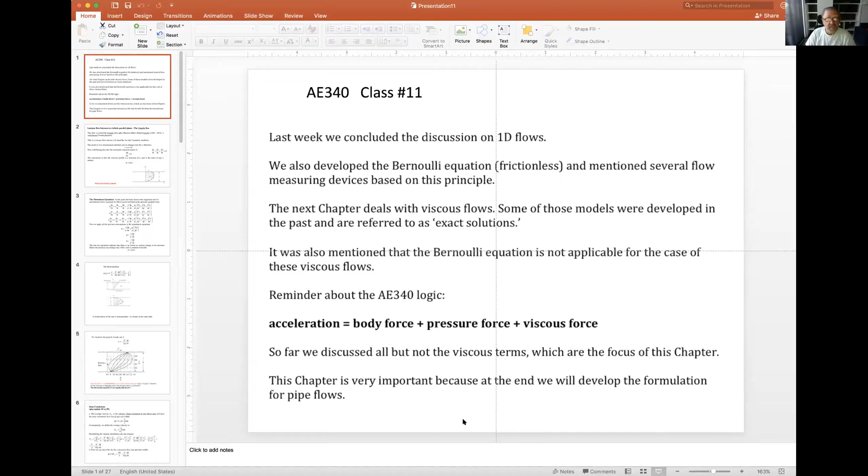We developed the equations, then moved to hydrostatics for the pressure, and then got back to the integral formulation for the one-dimensional flow. We added the Bernoulli equation, which is good for frictionless flow. We've seen that people like that kind of model, and many instruments, even if there's slight friction, are based on that principle: Pitot tube, Venturi tube, orifice, even injectors could be modeled with this type of approach.

Then we started actually looking at viscous flows. I'll repeat a little bit what we've done very quickly. In the past, those models were developed sometimes before even the full equations were completely clarified. They were referred to as exact solutions because they thought that the formulation of the problem is exact, therefore the solution is exact, and now they refer to that as exact solutions for Navier-Stokes equations.

Then just to confuse you a little bit, I told you that the Bernoulli equation is not going to work in this case, although there is a velocity distribution between the two parallel plates which are moving. The velocity is changing since one of them is moving the fluid, but the pressure is the same vertically, so you cannot use Bernoulli. This is an example where it's not working because friction is responsible for the whole flow.

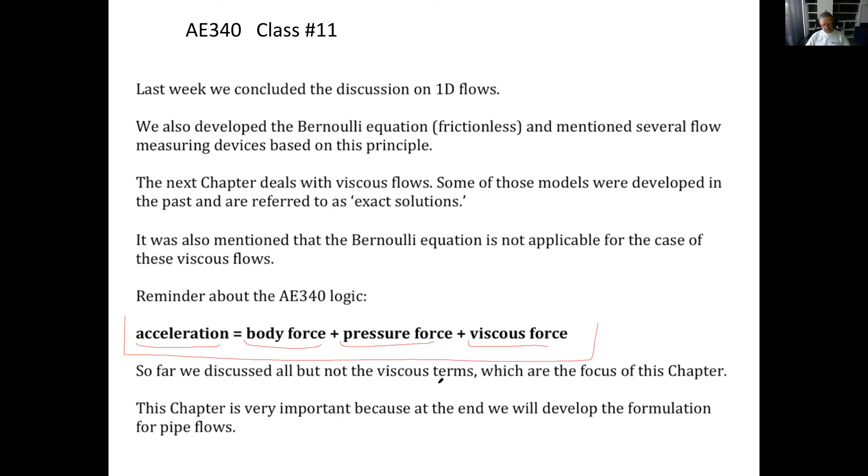So that's the whole chapter. But then the important part is actually the pipe flow. Later on, we're going to see that the pipe flow was developed experimentally, and amazingly, it is exactly the same as what we're going to arrive at using our formulations. Okay, so that's just the beginning.

So now what I'm going to do is just very quickly go over what we did so far. We tried to do the laminar flow between two plates. Let me get the pen. So this is the picture.

When we started the semester, I had this case where the upper plate moves and the lower plate is stationary, and we developed a linear velocity distribution. I call that a shear flow. The one we're doing now is a bit more generic because it also has a pressure distribution or gradient.

So why would the flow move between those two plates? Option one is that the upper plate moves and the lower one is stationary, and therefore the upper plate, because of the no slip boundary condition, kind of pulls the particles in the fluid with the surface. That's the linear case, this one.

The other reason is that, say, none of the plates are moving, but there is a high pressure on the left-hand side and low pressure on the right-hand side. So the fluid is being moved. Your toothpaste, that's how it works - you push high pressure on one side, the toothpaste comes out the other side. Same way. So that's the same model.

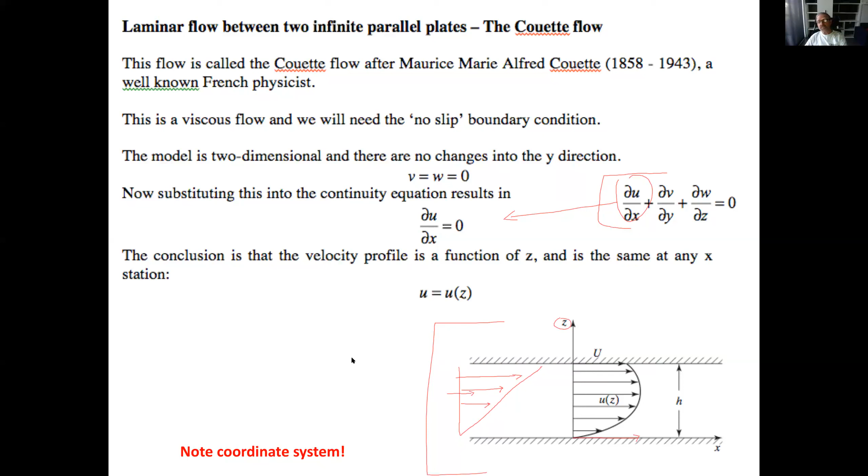So I'm still repeating what we have done last time. That was the continuity equation. Then we move to the momentum. So here is the...

Incompressible, steady state - I know you love that - with the assumption that there is no velocity in this direction, no velocity in this direction. So we ended up only with the pressure equals zero, or the pressure gradient. So the pressure must be constant in the y and z directions. And only some terms from that equation remain.

And then the right-hand side term is related to z, and this one's related to x. So we conclude that because the flow is continuous and it's happening everywhere, this must be a constant, this must be a constant. So the pressure gradient along the direction is kind of a straight line. So this is dp/dx.

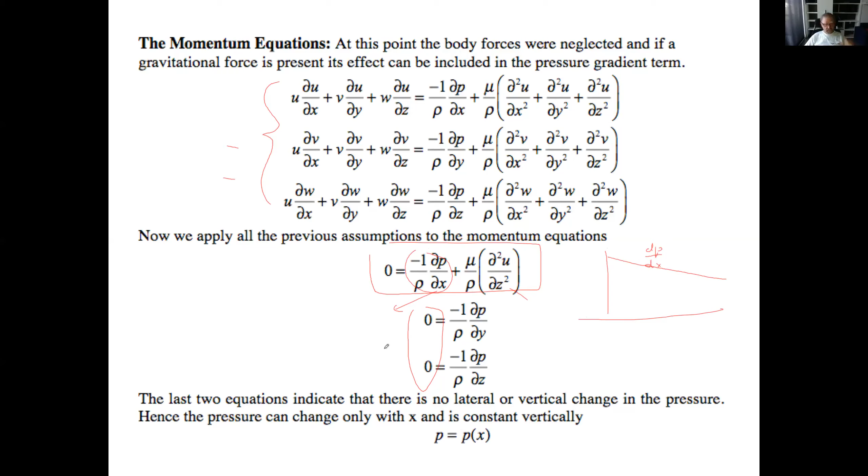dp/dx, and actually we can use ordinary differentials. So the pressure varies only with x, and that's it. So we concluded, which is very logical, a mathematical thing - we're not wasting too much time.

Then we integrated that expression twice, and we ended up with a velocity distribution. Not very difficult, straightforward, high school stuff. We ended up with this. If you put z over h here and make this term z squared over h squared, it's very clear that term is a parabola.

And this term is the shear flow that we studied at the beginning of the semester. So in this case, the flow moves because of the upper surface motion. In this case, the flow moves because of the pressure. Of course, there could be a combination of both, and that's why we have this here.

The minus sign is a result of dp/dx. If you remember, if you want the flow to move in this direction, the x direction, then the pressure has to go down - high pressure on the left, low on the right, so dp/dx is negative. This term is negative, therefore we need the minus sign here. And then I showed the combination of the two flows. This is a combination of the two flows.

Schematically, this would be the clear shear flow. This is when pressure is zero. Pressure is negative, pushing to the right, so it's a combination of the two. If the pressure is pushing to the left, there could be a reverse flow.

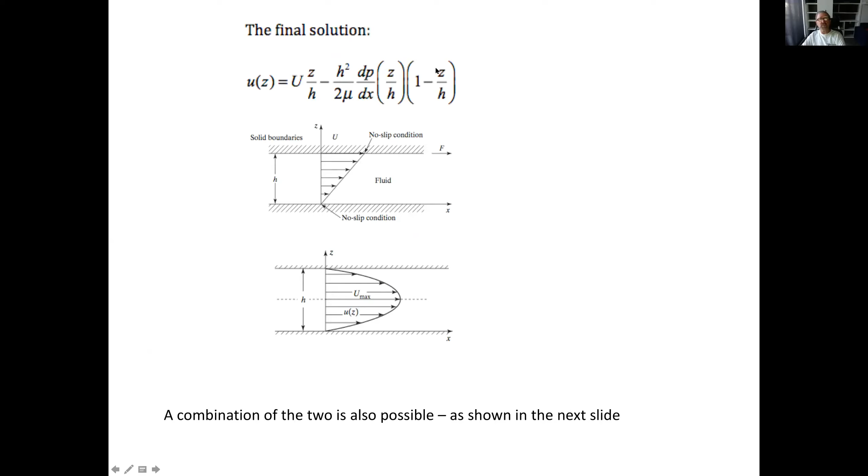I would like to also find out what is the maximum velocity. So what we do is we take the derivative of that velocity distribution. Let me go back here, remember that's the velocity distribution. I take du/dz, so it's going to be 1 over h, and 2z over h.

Okay, so that's what I did exactly, here it is right here. Now we want to find some sort of maximum, so we equate that to 0, and then we try to solve for the position. Let's solve for z over h, and we got this expression.

It's a bit tricky, I'm not sure if it's very elegant, but that's what we achieved. So now if we have this case, then what would be z? Remember, z goes from 0 here, to z, and to h.

If I have a pure pressure-driven flow, then u is 0... sorry, let me correct myself. In this case, the maximum velocity here -- because if you put dp/dx equals 0, that thing blows up, so it's not working. But in the case when u is equal 0, then we got half, which is this case. So this case is good.

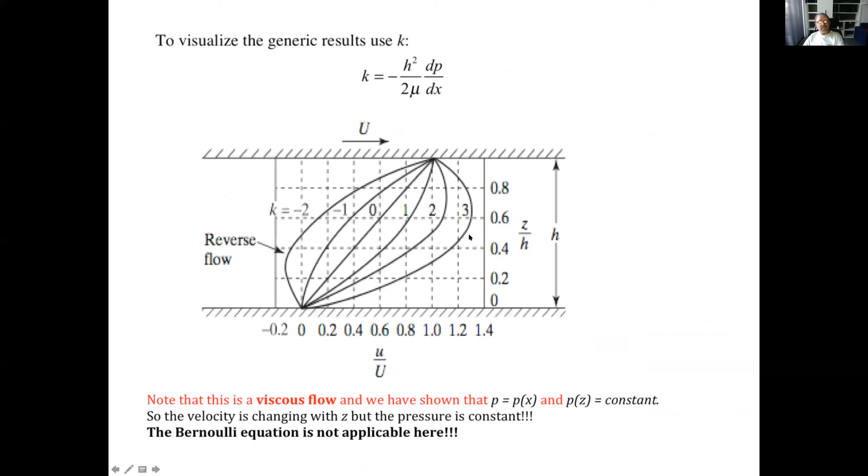Now, this is the first time that the Reynolds number pops up because of the algebra that we're doing with the fluid flow. Okay, so this is a very important moment. You guys should be really excited. I don't hear excitement now, but that's good, good. Thank you very much. Thank you. I have to cheer.

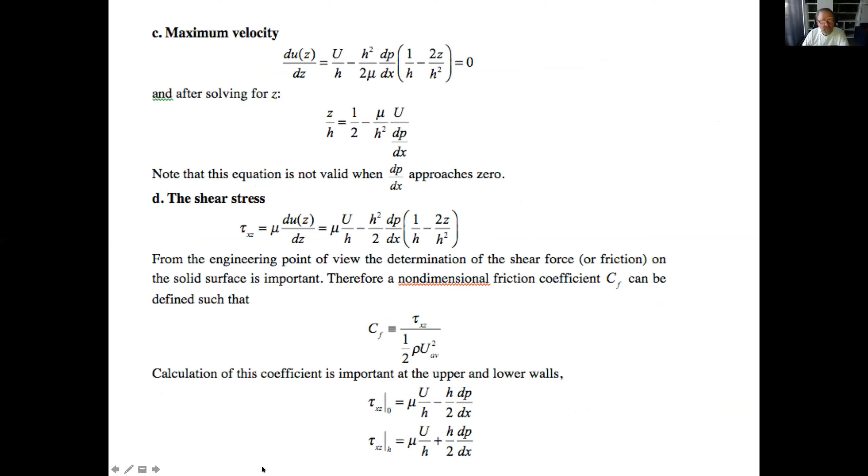It's not working well for me. Okay, I'm back here. Oh, I didn't select the pen. That's why I didn't like it. So here it is. We're going to see this trend.

So if I plot here Reynolds, which is basically velocity, then the trend is negative. So typically the friction, the relative friction, not the absolute friction, will go down with velocity. That's very interesting. We'll see that later on when we start talking about experiments with pipe flow. Okay, so we did that one.

That's the first time. Let's repeat the same thing. I think we're gonna have a numerical example. Let's have a numerical example, and then we repeat the same thing for the flow with pressure.

All right, let's see the numbers, how this thing looks. So we have two plates, the upper one moving at 5 meters per second to the right. The lower plate is stationary. Clearance between them is 1 centimeter.

We want to find out how much force is needed to move the plate. Let's see what we've done so far. The average velocity is at the center, which is half of 5, so 2.5. How much fluid goes through a section per unit width, per 1 meter? It's 0.01, which is the height h, times 2.5, the average velocity, multiplied together giving cubic meters per second, a very small number.

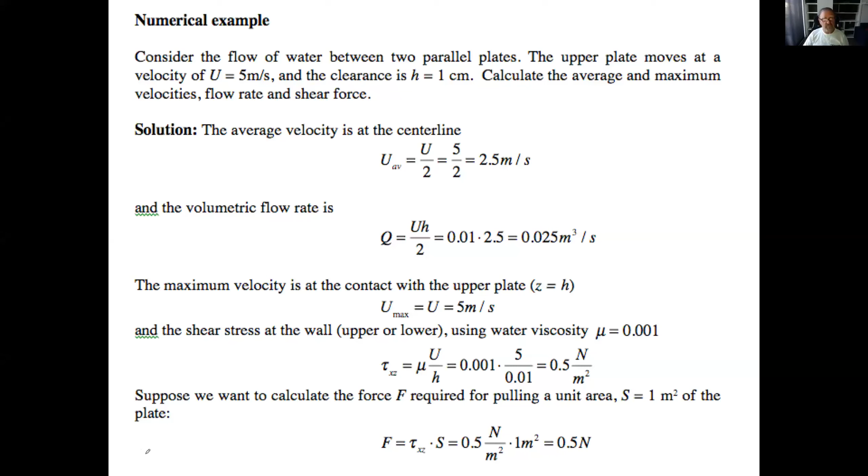Okay. All right, thank you, moving on. Same exercise. Okay, let me grab the pen.

So it's the same formula for the velocity distribution, but I dropped the first term, which is the u half, z over h. So I dropped that one, and this is due to the pressure. Going back, if you look at the formula for the average velocity, we lost u half here, so that's the term that remains.

One more time, average velocity versus pressure gradient. I was all excited about that, if you recall. Pressure and flow rate are related directly. The volumetric flow rate is the same per unit width, we just multiply by one more h, okay? And then there was the formula we didn't like very much, with z over h. But remember, it turned out that if u is equal to 0, the second term vanishes, so we ended up with z over h. So the maximum velocity is at the center.

At the center, we go back to this formula and plug in z over h equal to h half. So it's going to be 1 minus 1, 1/2. So this is going to be... it's 2, 2, 4, 8. So it's going to be u max equal to 8.

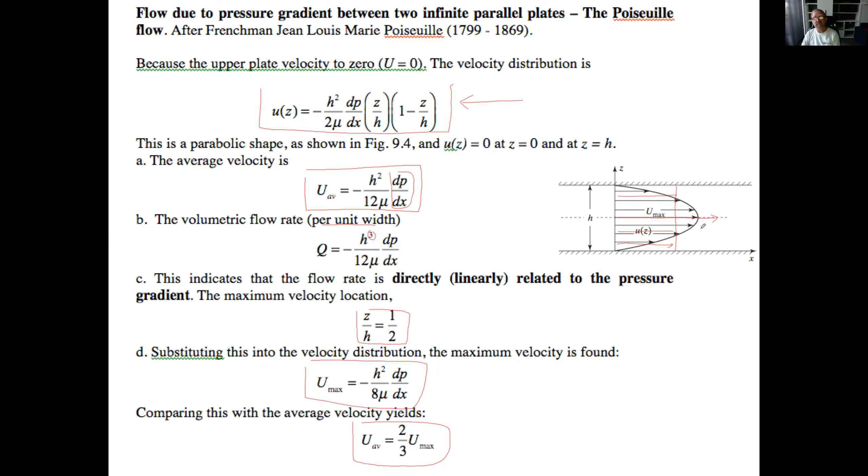Now we're looking at the average velocity, and it turns out that the average velocity is 2/3. So this is the average velocity, which is 2/3 of the maximum velocity. Very interesting conclusion.

All right, I'm moving on. Now let's do the other thing, let's do the shear. If you remember, the shear was this. Let me grab the pen, I'm just copying the same expression. If I'm going to plot that, I already plotted this, the shear looked like this.

Positive on the lower, zero at the center, negative on the upper side. Plugging in z equals 0, we end up with a minus. If we plug in z equal plus h, we end up with a plus. So it's positive on the plus, dp/dx is negative, therefore this is negative on the upper, positive on the lower, as we discussed before. This is the expression, and again, because of the coordinates, otherwise everything would be plus.

Okay, CF, it's tau, I just plug this one in here. We got this expression, but it's not really very elegant. So we go back to the previous page where we showed that the average velocity is this. The reason is we have average velocity here.

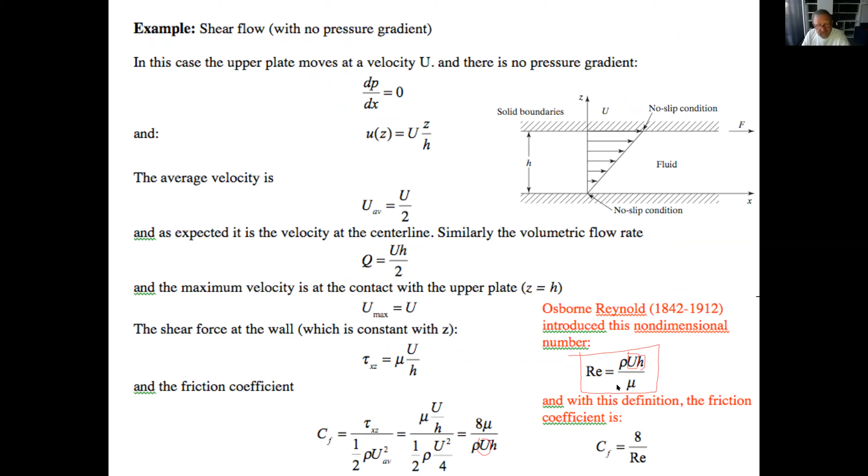Same story, slightly different numbers. Also pay attention that here we used the average velocity, and in the previous slides we used the actual velocity. So one more time: the Reynolds number is defined like that, but you can pick H as whatever you want, but usually you have to pick it wisely so it will be more representative of the problem. I just want to point out that between these two cases, the definition of the Reynolds number is slightly different. Don't blame me, that's how it is.

Okay, so basically at that point I concluded the discussion on this. The more important part, which is the flow through tubes, will come later. But I need to do some examples on this case to strengthen our understanding, and also do some little juggling. So let's call the next two slides juggling, or trying to look at interesting stuff.

So here is the flow due to pressure. I'm trying to take a control volume from here to here, and now the control volume is in equilibrium. So probably it is pulling back the control volume by the force F here, because the shear pulls this way. So there is shear on the upper surface. And how much is the shear? It's tau times the area. What is the area? It's the length.

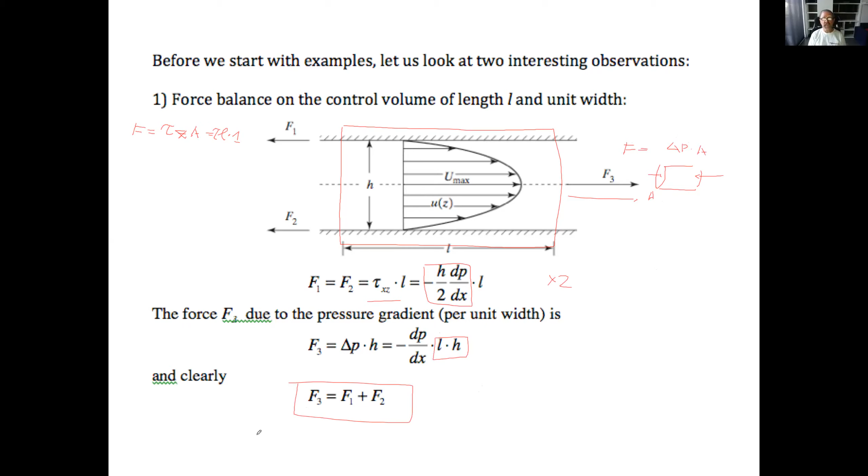Okay, that one, let's do another one. Again, it's not super important, but just an interesting comparison between the two flows. Let me grab the pen. The flow due to pressure distribution or pressure gradient, and the shear flow. We're trying to show two cases when the shear... I kind of missed the angle here. The shear angle is the same in both cases. So in that case, that's very simple, we already said that the shear is constant.

Now we need to figure out what is the shear on the wall, but we ended up with this expression. It's really not very user-friendly for that particular purpose, so we would like to resolve what is dp/dx. Also it would be nice to refer to maximum velocity, so that was the expression for maximum velocity. We solve this for dp/dx and we end up with this. Somehow the number is 4. So it turns out that the plate has to move 4 times faster than the maximum velocity due to the pressure gradient in order to have the same shear at the wall.

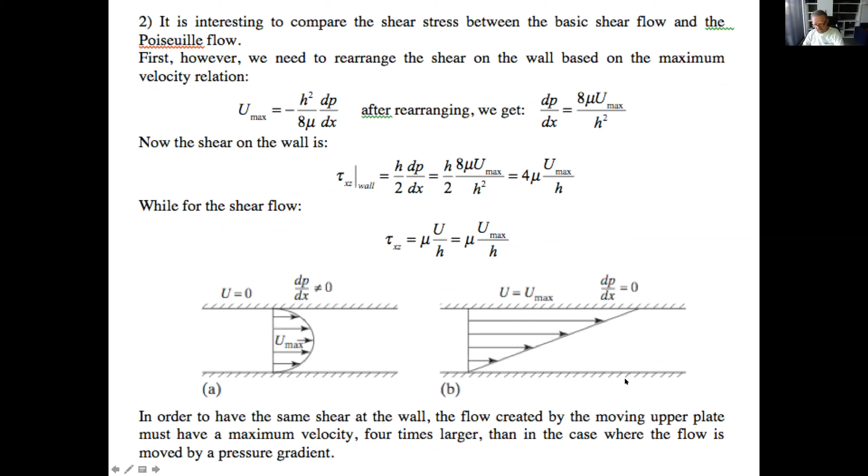Friction coefficient. Now, I mentioned that right now these two numbers are kind of abstract. You say, okay, 10 to the 4th, who cares? But later on we're going to learn that the nature of the flow, if it's laminar or turbulent, heavily depends on the Reynolds number. Where did I go?

Here am I. So just remember that the Reynolds number is going to be very, very important. It's going to give the limit. In case of pipe flow, it's about 2,000. And then the friction coefficient, we'll see the numbers later on and you'll see if it's big or small. But right now that was kind of an algebraic example, to see how big the quantities are and how they look like.

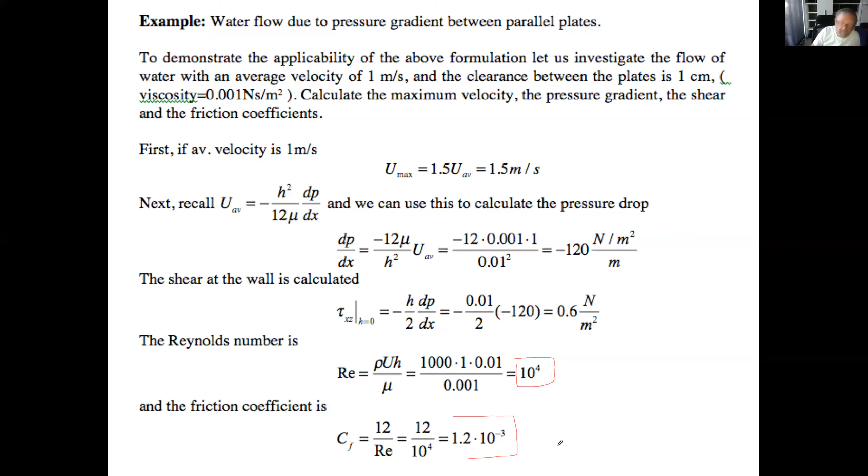Okay, so we started with a simple problem. So what can the professor invent? That's usually what the students are asking. So here's one. Okay, so let's say that the upper plate, here's the picture.

Let me get the pen. This was in an exam one day, a few years ago. So the upper plate is moving at a certain velocity, u, which is given as 10 meters per second. And then we have, oh, this would be rho, okay. This is oil, rho.

Okay, I'll check it in a minute, because sometimes the word processor changes things here. And that's mu. Okay, thank you very much, word processor. Okay, Microsoft, that's what Microsoft does to me. Anyway, so...

The upper surface moves, and then we would like to have zero shear on the upper surface. So most likely, we have to add some dp/dx.

So if you recall, we took the velocity distribution and multiplied by the derivative, mu, and this is what we found. So staying simply with math, we want this to be equal to 0. So then we have this expression. This is just algebra. We're trying to solve for how much is the pressure.

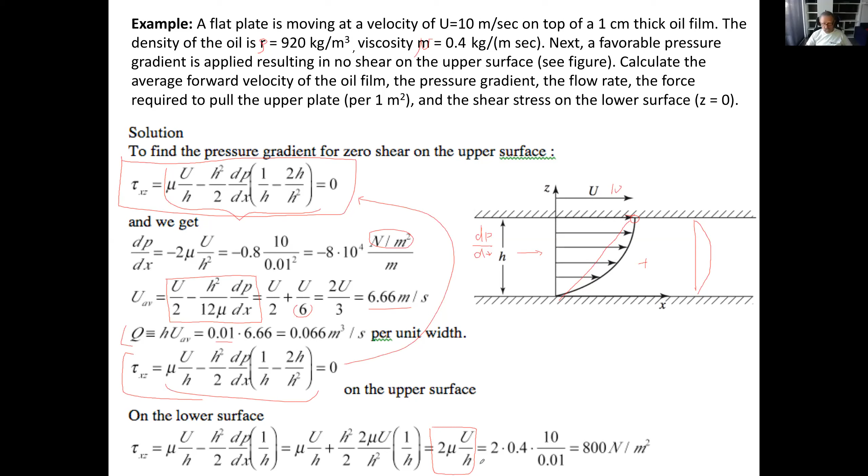Okay, let me just check for myself what that is. Oh, I have 2 more examples, 2 more examples. So again, what can the professor invent? Remember that I dropped the body force, the rho g term, because I said that we can replace that with gravity.

So let's see the problem first. We have, just a second, let me move that here. Parallel plates, assuming the oil density, again this is rho, unfortunately, thanks Microsoft, and this is mu, Microsoft. And spacing is 1 centimeter. So imagine a 2-dimensional container, it's kind of a long one, and the spacing is 1 centimeter. It's full of liquid, which is oil. Viscosity is 0.3, it's SAE 30 basically.

And what's the velocity profile? We know that now the velocity profile is probably going to be parabolic, like described here, like here. So it's going to be a velocity profile like this. So we need to do a whole bunch of calculations. And why is the flow moving?

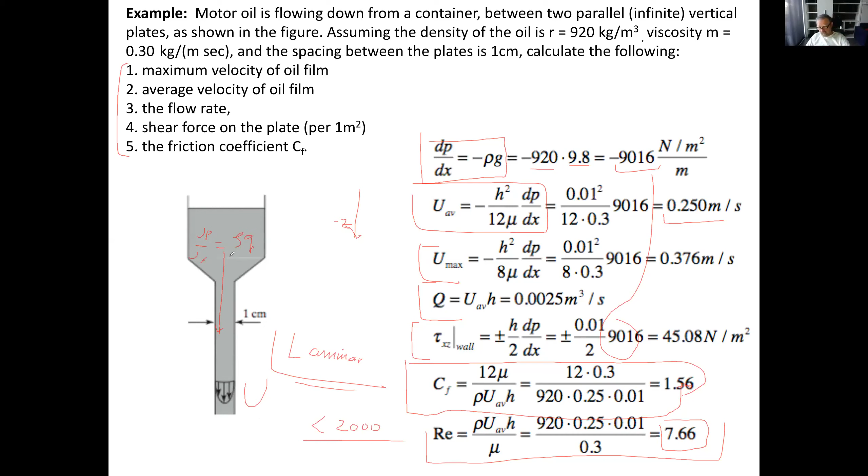So, another tricky question, again from an exam way back. We have the velocity distribution for the flow due to pressure, the Hagen-Poiseuille flow, and we found the velocity profile, which is depicted right here. That formula is this picture. What is the average velocity? We've seen that this is the maximum velocity, and the average velocity is actually 2/3 of it. So this is U average.

What we did not do is tell you what is the coordinate Z over H for this position, and that repeats itself here too, Z over H. So how do we solve that? Where is the velocity equal to the average velocity? There's no rocket science here. This is the velocity distribution, and it must be equal to this term. Let's compare one to the other, and here we have an algebra where the only variable is Z over H. Of course, H squared over mu dp/dx, I can cross out.

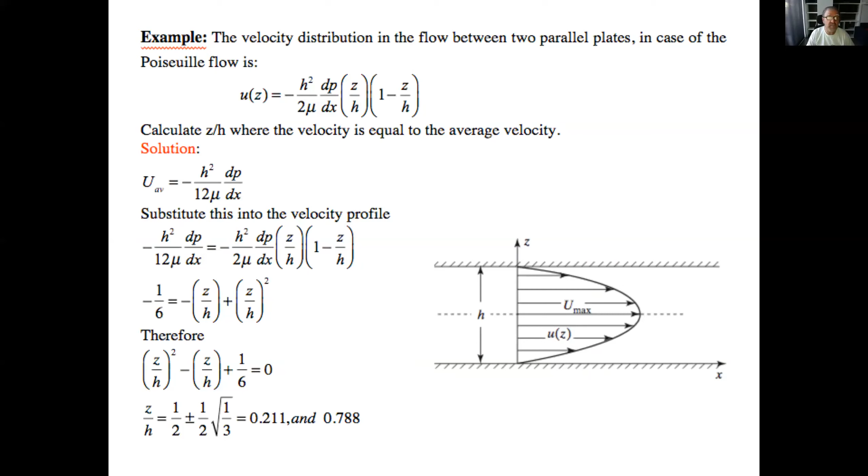Okay, so we are towards the end, I have 8 minutes left or something. We want to do the same thing. It's not scary. It's a bit scary, but don't get scared. Okay, let me go here.

So we would like to do the same thing, but now for the flow in circular pipes. This is a really important problem, and students will use it. Turns out some of the formulation we're going to do is very practical, actually working pretty well. It's called the Hagen-Poiseuille flow in circular pipes.

In the 19th century, it was Hagen in Germany and Mr. Poiseuille in France. Mr. Poiseuille was 2 years younger than Hagen. I'm not sure if they ever met, but historically we have quite often, like with the Navier-Stokes equations, two people developing the same things without talking to each other, because there was no internet. Even the mail didn't work—they used pigeons and stuff like that. So don't be amazed, we are in a different world now.

I mentioned the math is very similar, but we need to now look at cylindrical coordinates. It's going to be very, very similar, but with cylindrical coordinates. I know you love cylindrical coordinates, but I'm telling you it's going to be almost exactly the same. Actually it's going to be more elegant because we're going to pick the coordinate system at the center of the pipe. So if I look at the shear, it's going to be positive in both directions. That kind of resembles the flow due to pressure, it's very similar.

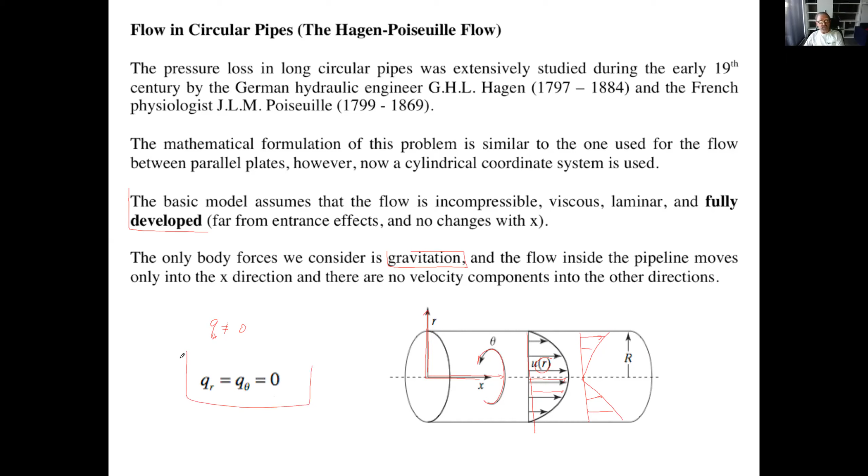I have a few moments, and then we'll stop. So now I'm going to do the same thing as I did before. I'm going to show you the full equations, and then we just simplify them by this type of assumption. So let's jump into that.

I mentioned that the coordinates in the book, the Navier-Stokes equation, appear in terms of the cylindrical coordinate. Here's the cylindrical coordinate at the bottom. So in our case, the pipe is going to go along here, and this is the center. We mentioned there is no tangential velocity, no radial velocity, velocity only in the x direction.

And this would be the continuity equation. Looking at the continuity equation, no r direction, no theta direction. So I end up with dqx equals 0, which means q of x is a constant, it's fixed. So qx is constant - it's only a function of r, not x, it's a constant.

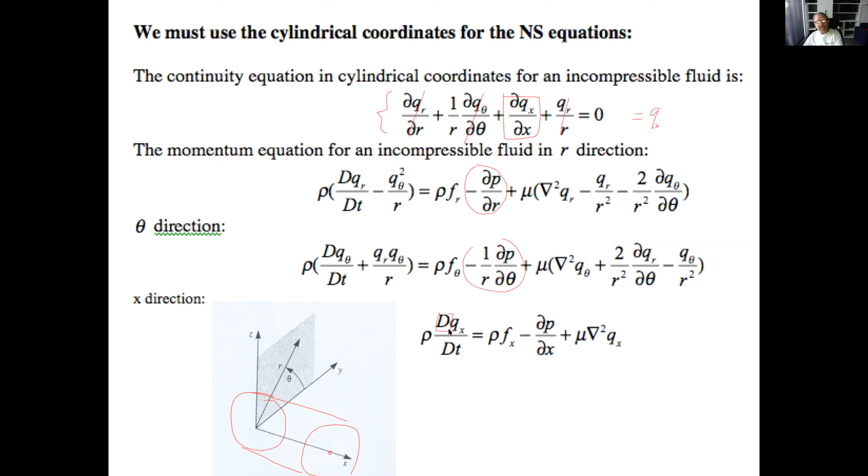Then I'm looking at the Navier-Stokes equation. This would be the r direction, r, q theta, nothing, everything is 0. Theta direction, everything is 0, but this term we cannot say that about. And here, this is the material derivative. The next slide, I'm going to show that. We're running out of time, let me show the next slide.

Let's just talk about what I mentioned earlier verbally. The continuity equation is this, but then I claim that because we assume that the velocities are 0, this is 0, 0, 0 because of that argument. And therefore this equation becomes that. So if qx is constant, then the only variation is possible when it is a function of r, which is depicted here. That's the only possibility.

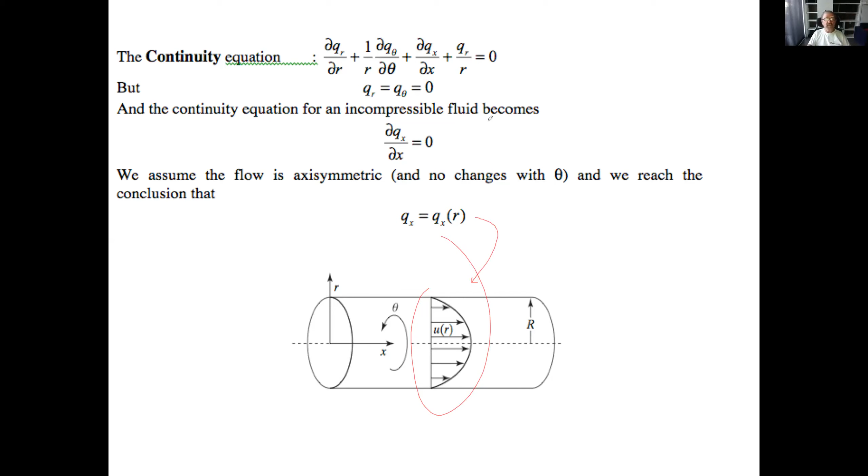So now this was the continuity equation, and we have to move to the full Navier-Stokes. I'll just show it to you and repeat it next time, very quickly. We have the three directions - but only one is applicable. All the x derivatives are basically going to be zero, because we stated that dqx/dx is also zero. So this goes away. We have no body force, and then we have to look at this term. We threw away the terms in the r and theta directions. So in the r direction, this equation, theta direction, this equation, and this one is a bit more complicated in the x direction, but we'll end up with the same.

This will tell us that the pressure is constant in the radial direction, very much like we had before - we had a flow like that, and we said the pressure is constant along a straight line. Tangentially, the same story, constant. This one we have to integrate - it's an algebraic integration. We'll do it next time more carefully.

Thank you for being so quiet. Hopefully I didn't put you to sleep. I think the flow in pipes is going to be a very interesting topic, particularly for civil engineers. Then you have open channel flows, and basically they're all based on that formulation somehow.